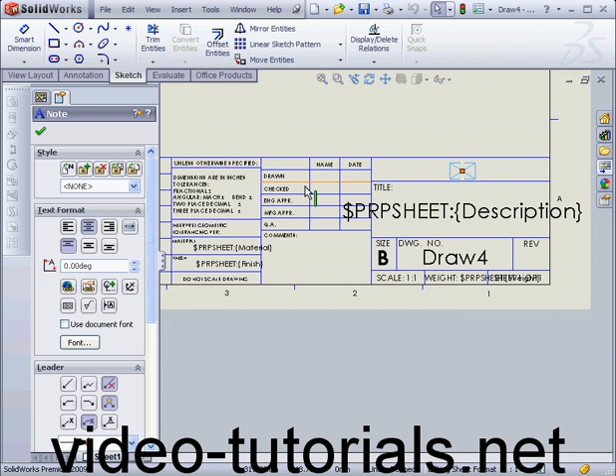Okay, let's go to File on the main menu, Properties, choose the Custom tab, and from the Property Name drop-down window, let's select Company Name. The type we'll leave as text, and we'll enter a value here. Let's enter the company name, VTN, click OK. Now as you can see, the company name field is populated in our title block.

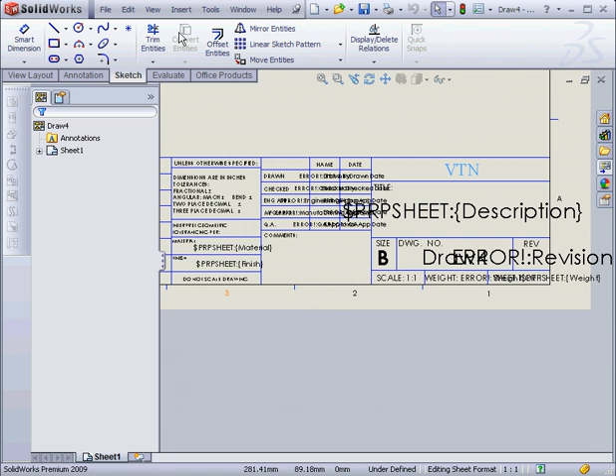By the way, if you see a bunch of error messages here, go to the View command and uncheck Annotation Link Errors. Here's what I'm talking about. There's a bunch of gobbledygook here. Let's go to View and uncheck Annotation Link Errors.

Okay, let's look at the number of sheets field. I'm going to grab this note and move it up so that I can see the number of sheets field a little better. Okay, if I right-click and select Edit Text in Window, we see that the note is linked to two properties. There's the current sheet, and the second property is the number of total sheets. Let's cancel out of this for now.

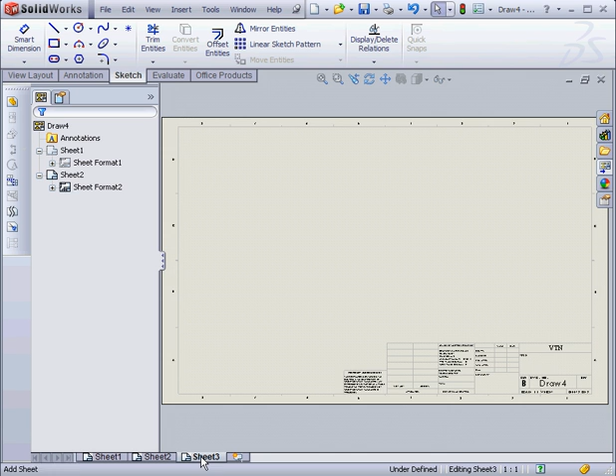Now let's insert a couple more sheets. As you see when I zoom in, the sheet displays 3 of 3. So the info in our note did update. When I mouse over the sheet tabs, I see previews of those sheets. Let's right-click and delete. Yes. And the info in our note is also updated. Incidentally, the second sheet also shows the company name, as well as the first sheet.

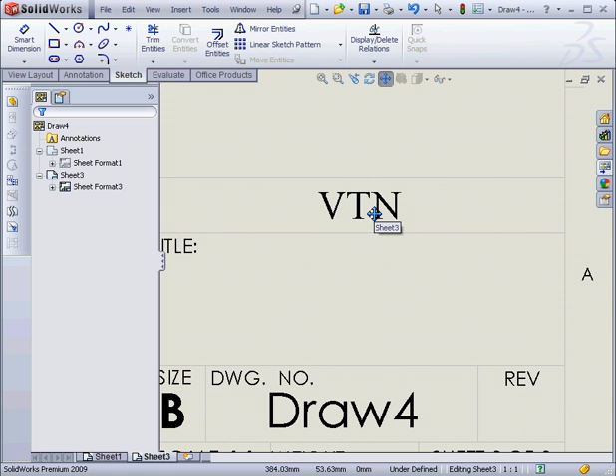Let's take a look at the scale note now. Right-click on it and select Edit Text in Window. Oops, got the wrong note. Let's try that again. Right-click on the scale note, Edit Text in Window. Here we see that this note is linked to the sheet scale property. Let's cancel out for now.

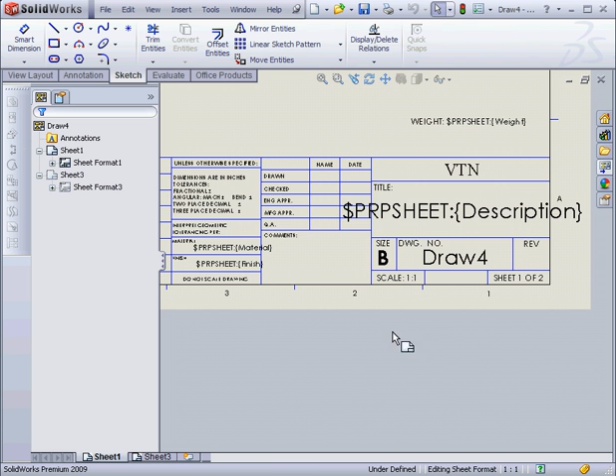Now if I right-click and select Properties, let's modify the scale. We'll change it, for example, to 2:1. Let's click OK. As you see, the scale changes here as well. Let's revert back to 1:1. Click OK.

And the last note, Description. Let's right-click on it, Edit Text in Window. As you can see, this field is linked to the Description property. Let's cancel out for now. And let's go open a part. B14-A. Oops, got the wrong part. All right, let's try that again. B14-A.

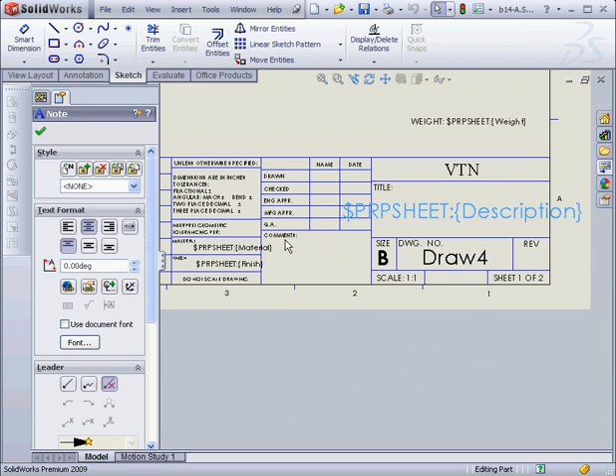Now when this part is opened, let's go to Properties. We'll choose Description from the Custom tab. Text. Let's enter a description. Our value will be My Part. Click OK. And back to our drawing document.

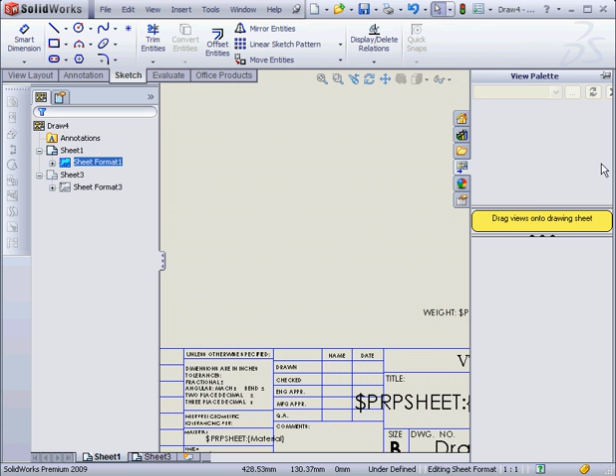I simply bring in something. Let's open the View Palette. There's nothing here right now. First, select Edit Sheet, and now the model is available. Let's drag out the front view and click OK. Now, under the title note is our description, My Part.

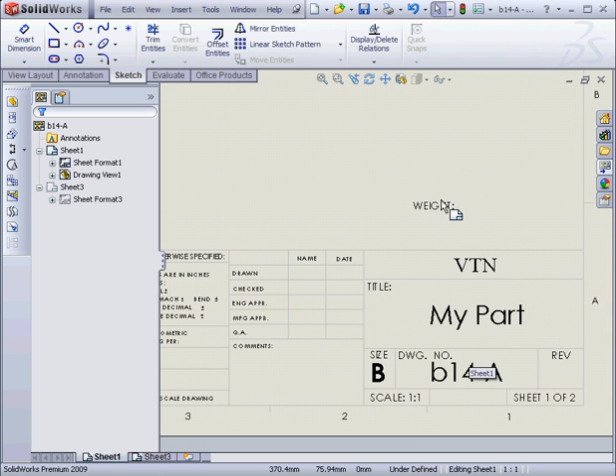Okay, let's edit the weight field next. We're going to go back to My Part. Now let's go to File, Properties. On the Custom tab, let's choose another property from the drop-down menu, Weight. It'll be text. We'll enter Mass and click OK. Let's go back to our drawing document. As you can see, the weight is now displayed in our note.

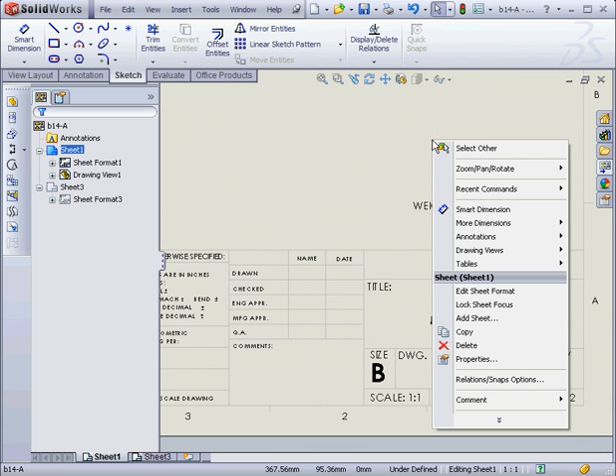Right-click, Edit Sheet Format. And now I'm able to grab this note and drag it to its proper location. This concludes our tutorial about editing the title block.